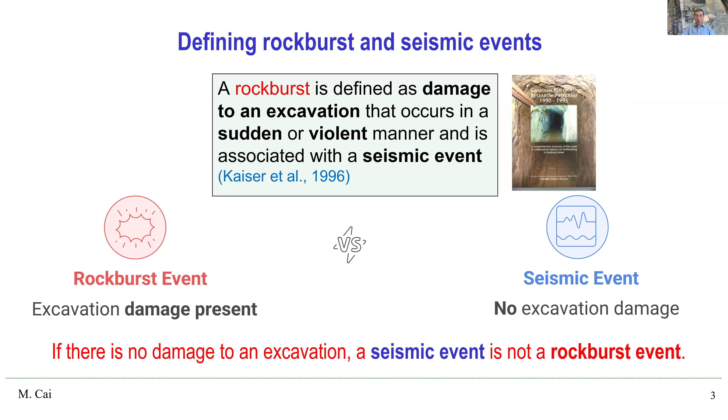At the same time, we also need to differentiate between a rockburst event and a seismic event. A seismic event might be just something where we have vibration of the ground. When we talk about a rockburst event, usually there's damage to the excavation. But for a seismic event, not necessarily will there be damage. So if there's no damage to an excavation, normally a seismic event is not called a rockburst event. Understanding this distinction is critical for evaluating rockburst hazard and planning response.

Rockburst can be generally categorized into three types: strain burst, pillar burst, and fault slip burst. Strain burst often occurs at or near the excavation boundary, where the stress concentration is the highest. It can also occur in tunnel and shaft walls and face, even pillar walls.

Pillar burst, on the other hand, occurs when a highly stressed pillar collapses violently. In this case, the pillar core has to fail - we call this type of failure a pillar burst. If it's only the skin of the rock that is bursting, that's a strain burst. Fault slip bursts, of course, involve sudden shear along existing geological structures like faults, or it could be the creation of new faults due to shear failure of rock.

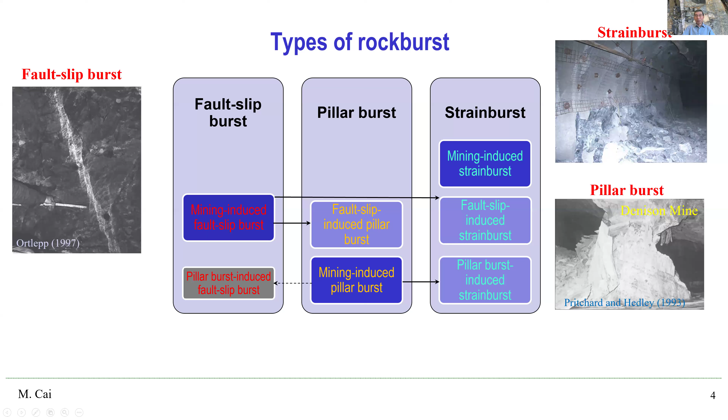In terms of triggering mechanism, the dominant force behind those events are mining activities - so that's why I show mining-induced types of events. If you have any of those events occur, like mining-induced fault slip events, those events can subsequently trigger additional events like pillar burst events or strain burst events. Similarly, mining-induced pillar burst can also trigger smaller events like strain burst, and it can also potentially trigger fault slip events if the fault is near critical equilibrium.

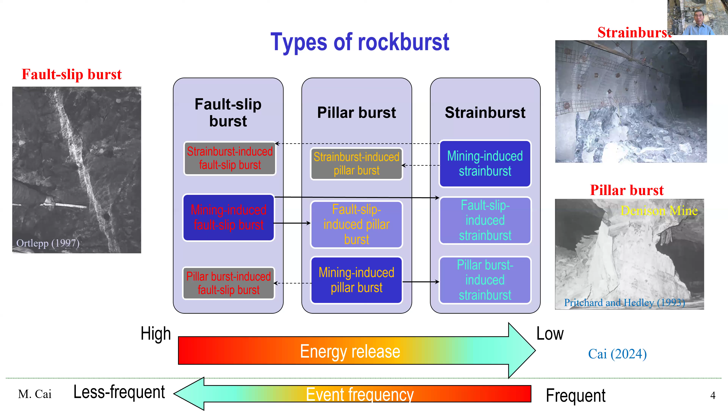In the same argument, a smaller strain burst event can also potentially trigger larger events if the pillar or the fault is in critical equilibrium. In terms of energy release, fault slip events release the highest energy, but strain bursts release the lowest. In terms of frequency of occurrence, strain burst is the most common type of event that we see in underground mines.

In terms of conditions for rockburst occurrence, many researchers and scholars have done a lot of research, and now we have a better understanding. I summarize them into four conditions. First, the mining-induced stress has to be high in order to trigger rock failure. If there's no failure, there will be no rockburst. It's that simple.

The second condition is that the rock has to be able to store a large amount of strain energy before failure. That's why rockburst normally occurs in competent rock that can store a lot of strain energy before failure. The third is the brittle condition: the rock has to be a brittle type of rock, because brittle rocks tend to fail violently, leading to large energy release.

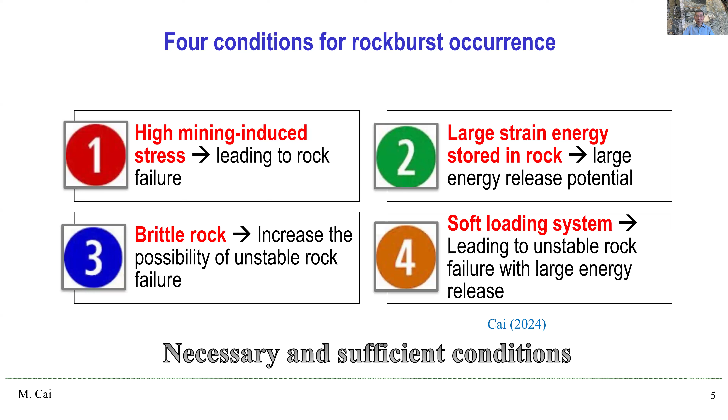And finally, the mine loading system stiffness has to be low. In this case, rock failure will be unstable or violent. So those are the necessary and sufficient conditions for rockburst occurrence.

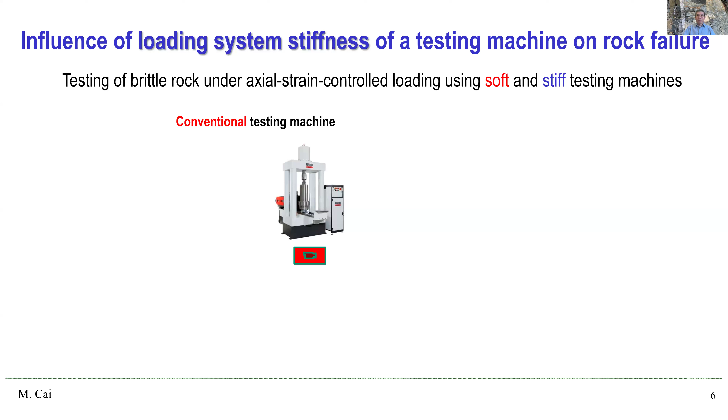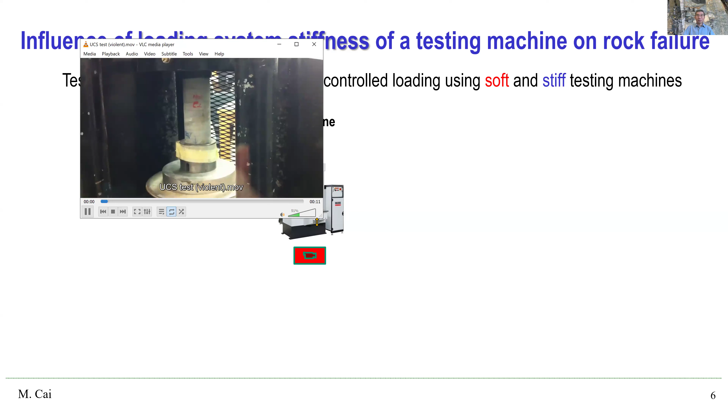Now, the loading system stiffness influence can be easily understood if we focus on rock testing in the lab. If you use a conventional machine to test rock, due to low stiffness, you're going to see violent failure. This is the type of failure. I'm going to play a video here.

Basically, we are creating a rockburst in the lab due to the low stiffness loading environment.

On the other hand, if you have a stiff machine to test the rock under axial loading conditions, for example a machine like Stiffman, we can actually control post-peak failure of rock without necessarily introducing violent energy release. So this is a test of granite using Stiffman.

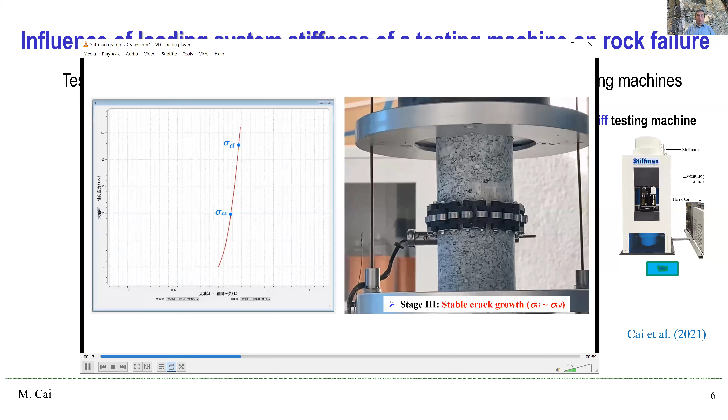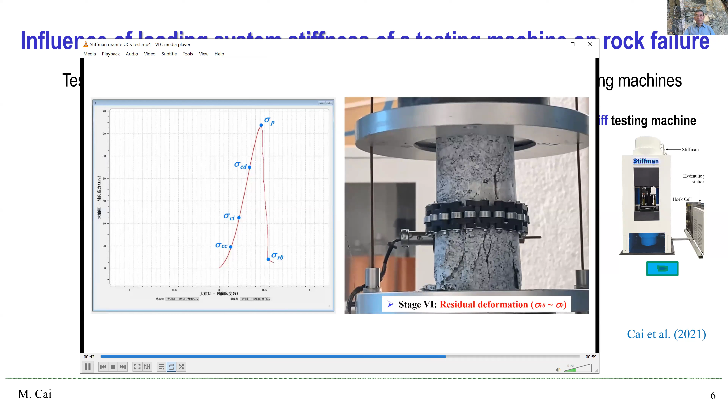As you load the rock gradually, this is pre-peak, and we have some characteristic stress levels, as you see here. Once you reach the peak, and it's going to reach the peak pretty soon, the rock just spalls and cracks, but without a violent energy release.

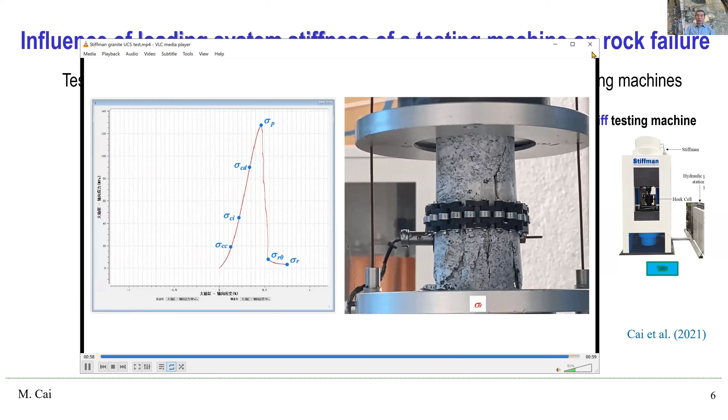This is because we have a stiff loading environment that allows us to control post-peak failure without excessive energy release. And if we look at the load-displacement curve, or stress-strain curve, assuming you have a rock with this kind of behavior...

But if you test this rock in a soft machine, once you reach the peak, the rock is going to fail violently, as you see in the video, with excessive energy release. The area under this load-displacement curve indicates the amount of energy that will be released. This type of failure will be violent—that's a rockburst, which we can create in lab testing.

But if you have a stiff machine with stiffness steeper than the post-peak curve of your material, you can control the post-peak loading process. You actually need additional energy, indicated by the area, to further fracture the rock. So in this case, we have a stable failure.

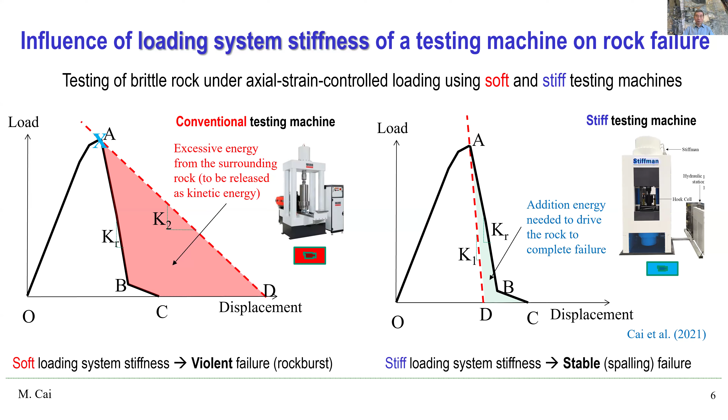Those two types of failure mode can actually be observed underground—not all failure will be violent, nor will all failure be stable. They can occur depending on the loading system stiffness. This is a condition I mentioned in the previous slides, a very important one.

But when we talk about rockburst hazard, we're talking about the likelihood and severity of sudden and violent failure of rock mass surrounding underground excavations. So rockburst hazard, of course, is closely related to seismic hazard.

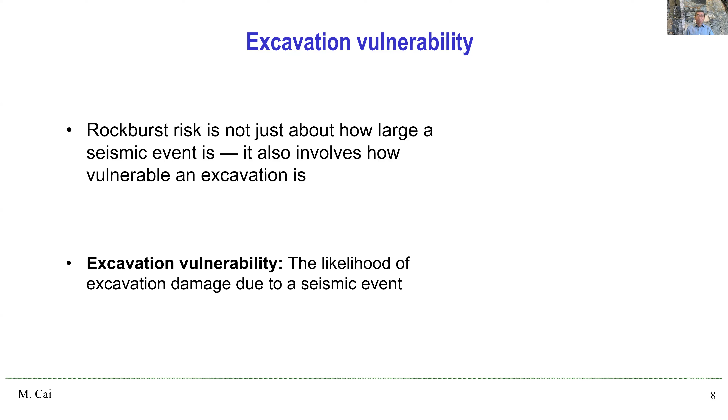This is another important concept in rockburst risk management. What is excavation vulnerability? It is defined as the likelihood of excavation damage due to seismic events. So only excavations with high excavation vulnerability will be prone to rockburst damage. This is a very important concept as well.

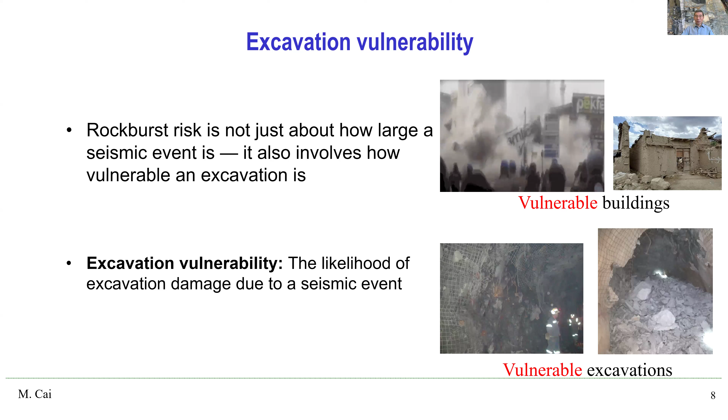In order to understand excavation vulnerability, let's talk about the building vulnerability to earthquakes. If you have buildings that are not well built, with low standards, sitting on bad foundations, those buildings will be very vulnerable to ground motion from earthquakes, and they may collapse and cause harm to people. Similarly, underground excavations, if they are not well designed or well supported, have a higher vulnerability. So this is easy to understand.

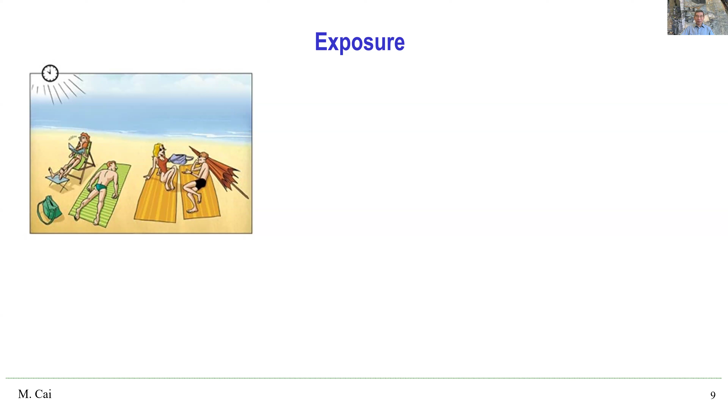Another important concept we need to understand here is exposure. People increase their chance of having skin cancer if they expose themselves to the sun for a long period. So if we want to mitigate this risk of skin cancer, it is wise to wear sun cream or limit exposure to sun. Everybody understands this.

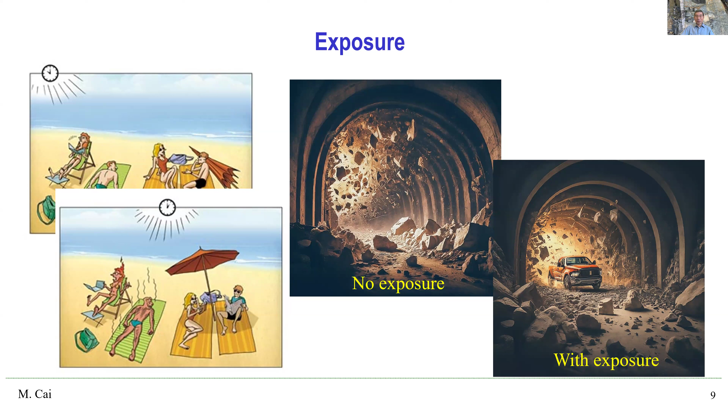Similarly, in underground mining, to mitigate the risk of rockburst, we need to limit or avoid exposure to rockburst hazard. And if you have exposure, the consequence could be dire. So exposure definitely is another aspect we need to consider.

Now, as we discussed so far, we know that rockburst hazard is the occurrence of a violent rock failure. Excavation vulnerability indicates the likelihood of excavation failure due to a seismic event, and exposure measures how a worker or mining equipment in a place could be affected by rock failure caused by a rockburst. So if we consider all those three aspects, the union of rockburst hazard, excavation vulnerability, and exposure, now we have rockburst risk. That's the definition of rockburst risk.

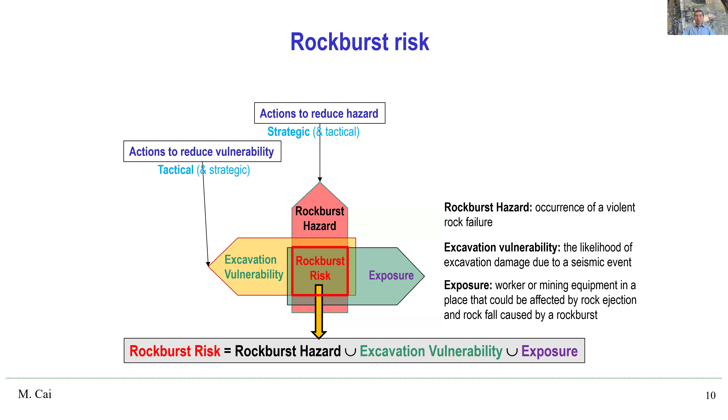So to reduce rockburst risk, we need to do something to reduce the hazard, rockburst hazard. Mostly we're going to use strategic and tactical measures. We can also take actions to reduce the vulnerability of excavations using various techniques. We also can take actions to reduce exposure, mostly using administrative measures. So all those things that we do is what we call rockburst risk management.

Next, I'm going to quickly discuss a very useful bow tie analysis of rockburst. Bow tie analysis is a risk assessment methodology that visually represents the relation between potential cause, consequence, and preventive or mitigation barriers of a specific hazard.

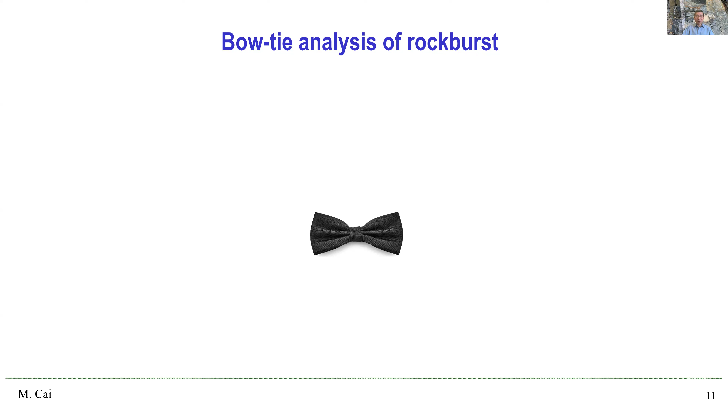So for applying this kind of analysis to rockburst, we first understand that on the left-hand side, we list the potential threats or causes of rockburst. Those can include high stress, for example large geological structures, poor mine design, mining sequences, etc. So those are the potential causes for rockburst.

The center knot of the bow tie represents the top event. In this case, we have the rockburst. On the right-hand side of the bow tie, we have the potential consequence or effect of a rockburst, which may include injury to workers, fatality, damage to mine infrastructure, mining equipment, loss of ore body, and operation disruption, etc.

Between the cause and the rockburst event lies the prevention barriers or control measures that we can use to reduce the likelihood of rockburst. And we have a few things listed here that we're going to discuss to reduce the likelihood of rockburst.

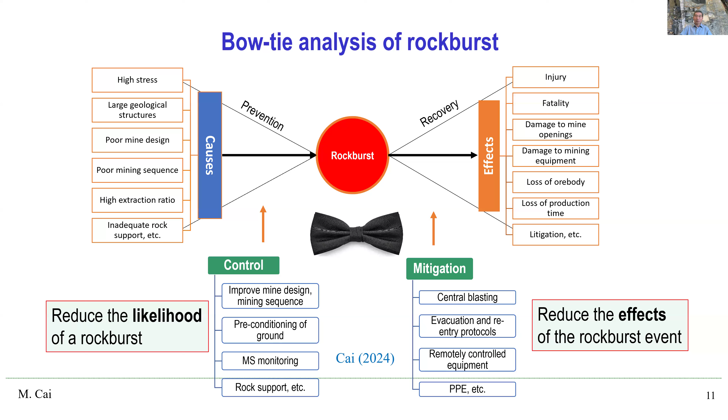And of course, between the rockburst event and the effect lies the recovery or mitigation measures that can be used to reduce the effect of a rockburst event. So here we have listed a few of those control measures. And of course we need to focus on the important ones, to help us understand which one is important, which one is less important.

Let's see the hierarchy of control. We have different controls, but not all controls are equal. So there's a hierarchy that simplifies all controls into 5 levels: elimination, substitution, engineering control, administrative control, and PPE.

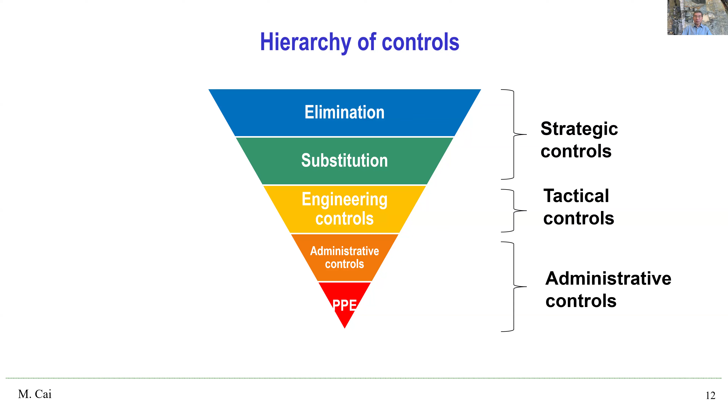Here, elimination and substitution address the rockburst hazard at the source and are the most effective during mine design and development stage. They are the strategic controls. Engineering controls prevent hazard from affecting workers and equipment - those are tactical controls. Administrative controls reduce the exposure through work practice, with PPE at the bottom of the hierarchy of controls.

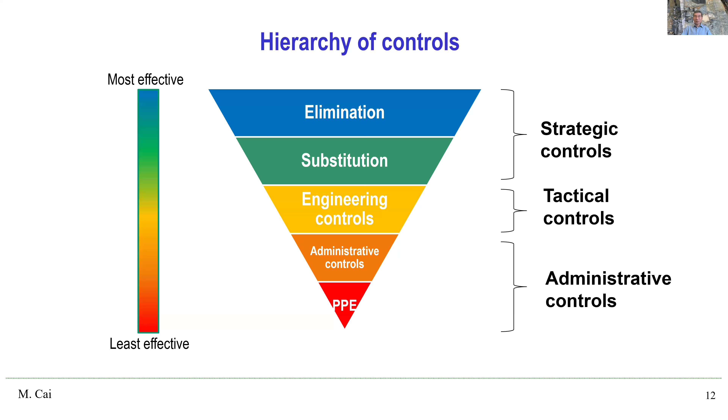As we move down from elimination to PPE, you can see that the effectiveness reduces. This is the hierarchy we can follow because it prioritizes strategic over tactical or administrative measures.

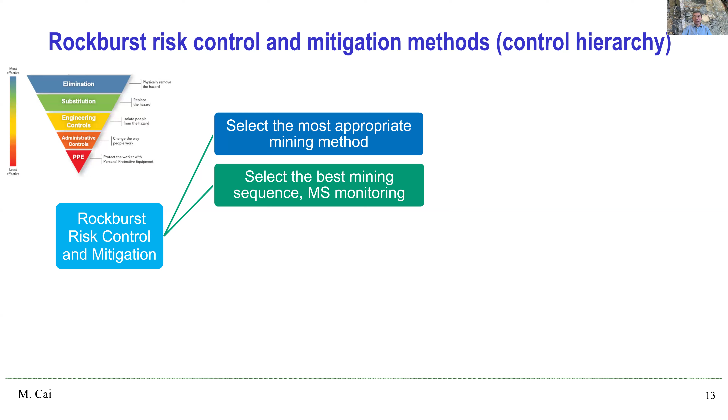Following those concepts of the control hierarchy, we can have a different method for rockburst risk control. We start from selecting the most appropriate mining method at the top, followed by the best mining sequence, use microseismic monitoring, conduct precondition of ground, use backfill rock support, and use, for example, remotely controlled mining equipment to reduce exposure. Lastly, use PPE.

So these different measures can be characterized into strategic, tactical, and administrative control methodology, with effectiveness ranging from most effective to least. Now I'm going to provide a few examples of discussion for each type of method.

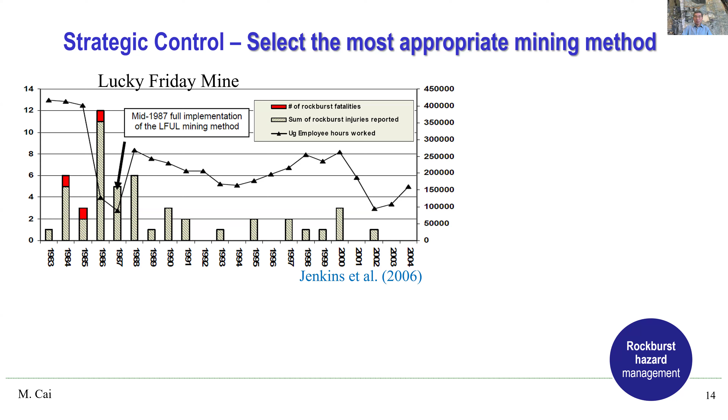Selecting the most appropriate mining method is at the top. Here we have one example showing the number of fatalities from 1983 to 2004 at the Lucky Friday mine. The mine used the traditional overhand cut-and-fill method until 1986, then switched to the underhand longwall mining method in the middle of 1987.

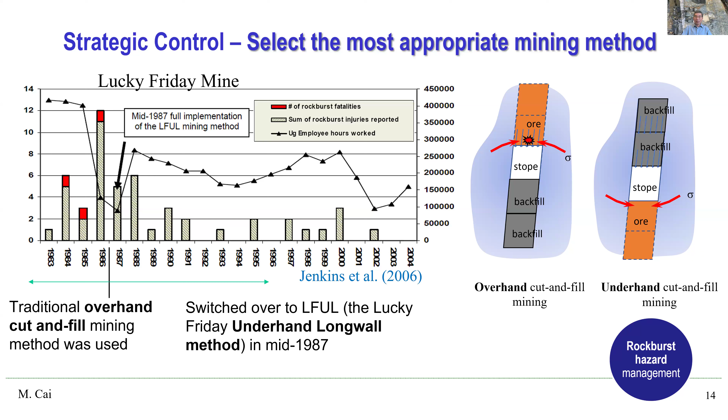Why did they make this switch? It's because the underhand mining method is much safer in a high stress environment. Since switching, no rockburst fatality has occurred at the mine site. This is easy to understand: if you compare overhand mining versus underhand mining, the highly stressed ground is either above your head or below it, which makes a huge difference when the stress is extremely high.

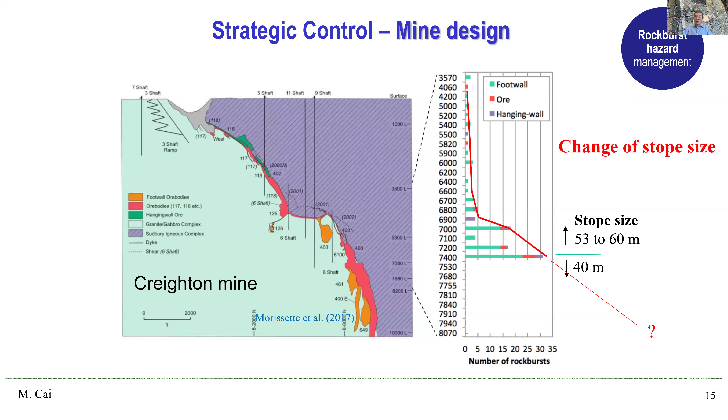But when we look at the size of the stopes above the 7,400 level, the stope size used was 53 to 60 meters. They later decided to reduce the stope size to 40 meters, and further reduced it to 26 meters in one of the ore bodies, the 461 ore body.

Due to the reduction of the stope size, you can see the number of rockbursts actually reversed the trend instead of increasing, and then decreased. This is easy to understand because if you reduce the excavation size, each blast releases less energy, and smaller excavations have less deformation potential, resulting in fewer rockburst events.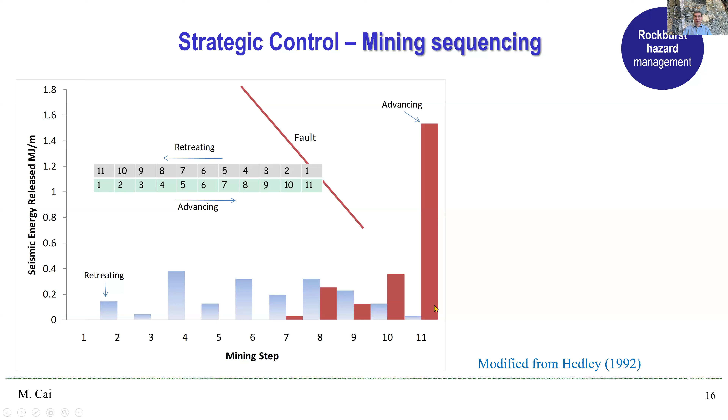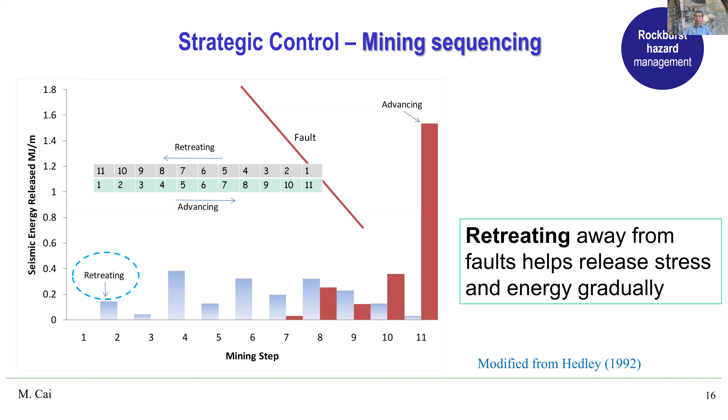If you are advancing towards the fault, you see a very large energy release in the last step. This is definitely not good in terms of energy release control. So retreating away from faults actually helps reduce the energy release and reduce the risk of rockbursts.

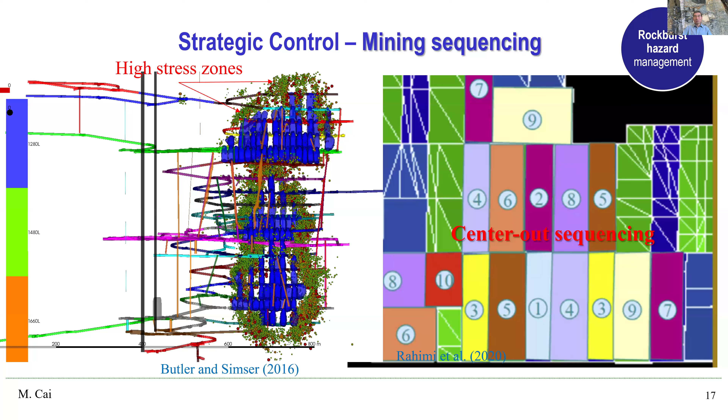For open stoping mining, we normally have primary and secondary stoping techniques, and center-out sequencing is widely practiced. Why is this useful? Because, based on microseismic monitoring data showing the concentration or clustering of events indicating areas of high stress, if you use center-out sequencing, you can push high stress to the outer boundary, keeping the low stress zone inside your mining area, which makes mining much safer. So sequencing is definitely a factor we can consider in rockburst risk management.

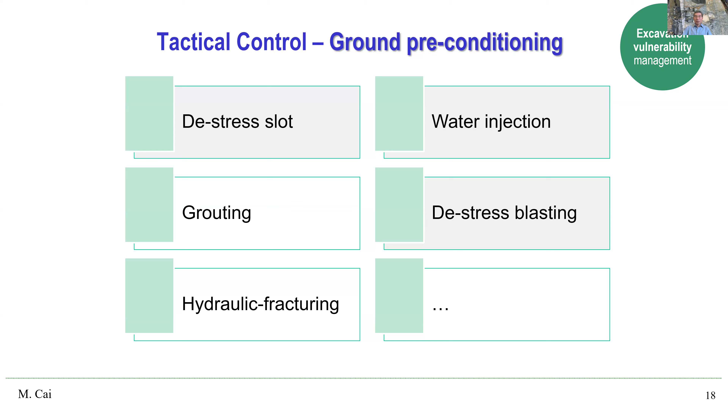For tactical control, there are many different techniques. Ground precondition is a category we talk about here, with lots of methods in this category. In hard rock mining, we mostly focus on destress blasting, and these days people also try to use hydrofracturing to condition the ground. Destress blasting has been practiced in many mines.

Here we have one example: this is the Onaping Depth mine during the construction of a shaft.

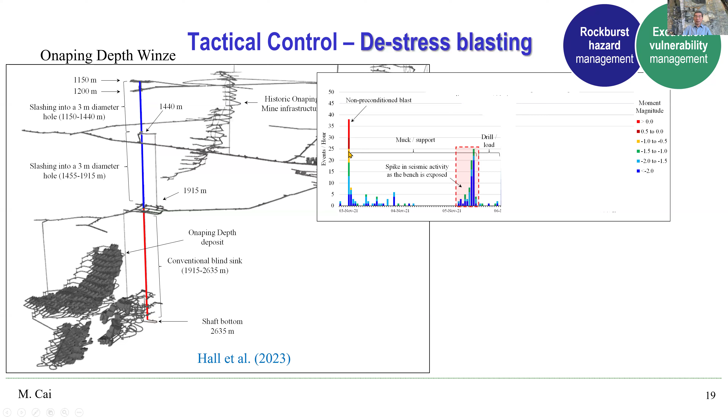This is the construction using conventional blind sink operations. In this case, we have people working at the face. Due to the great depths and high stress, the strain burst risk is extremely high. This example shows basically one cycle of development.

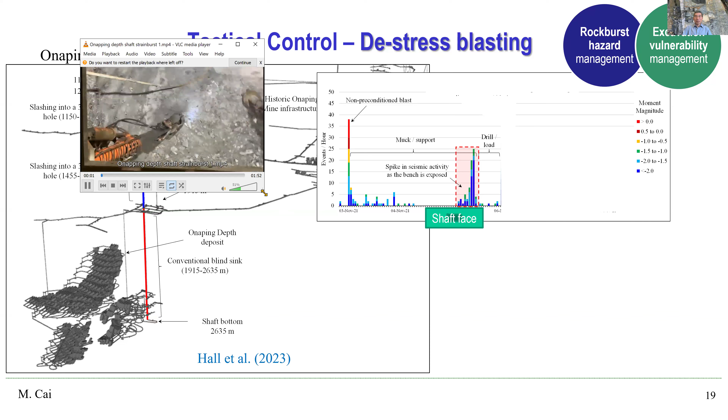After you blast the round, there's a spike of seismic activities, and then as you track it till the end, when the bench is exposed, you see a spike of activities. So there's a short video showing how dangerous it is to work at the face at the bottom of the shaft when the stress is very high without preconditioning.

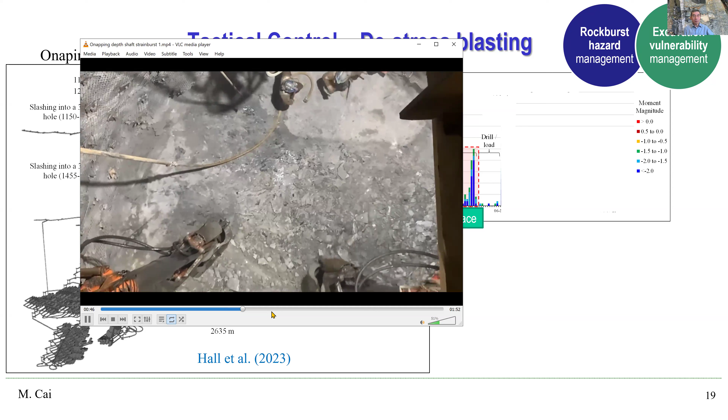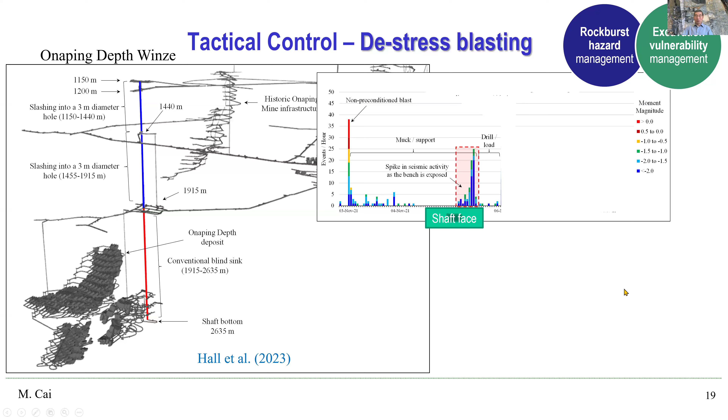Now you see the strain burst occurred at the bottom of the shaft. That's the type of strain burst events you can experience if no preconditioning is practiced.

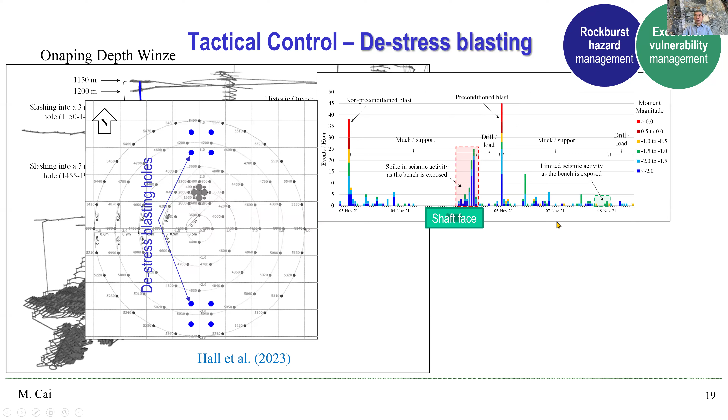This is not acceptable, so mines develop de-stress blasting techniques using different types of patterns. This is one type of pattern that's used. If you use de-stress blasting, you can see there's no spike of seismic events, and this has proven very useful in mitigating strain bursts at the face, because we have workers directly working at the face.

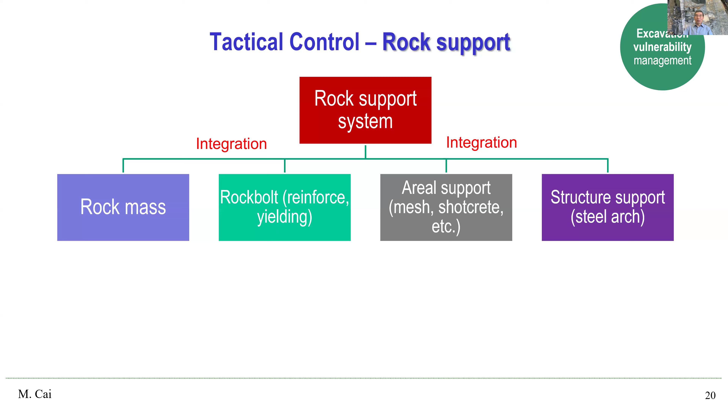Rock support is a technical engineering control measure. It's very important for rockburst risk management. The support system includes rock bolts, areal support, and the rock mass itself, which interact with each other to achieve the support functions.

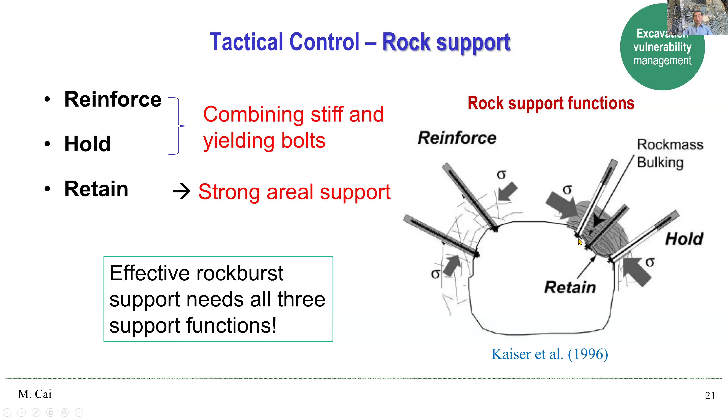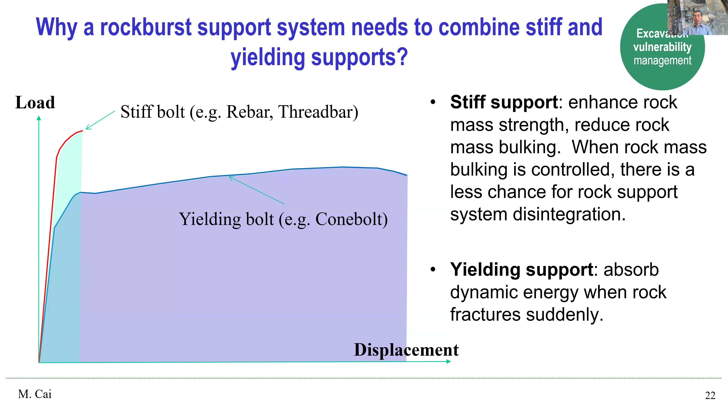In terms of support function, we have three major functions: reinforce, retain, and hold. Effective rockburst support needs all three. For reinforce and hold, we can combine yielding support with stiff support, but for retaining functions, we need strong areal support. It's important to combine stiff and yielding support because stiff bolts can reinforce the rock and control bulking to prevent disintegration of rock mass. Yielding bolts have large energy absorption capacity, which helps absorb sudden release of energy due to rock failure.

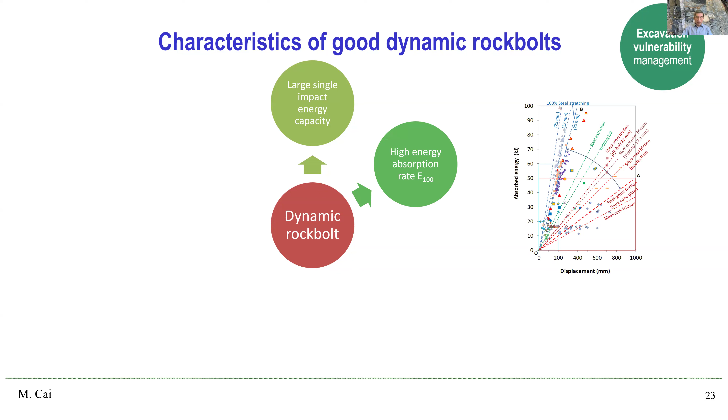Rock bolts play a key role in excavation vulnerability management. Here we list a few characteristics for good dynamic rock bolts. First, they need large impact energy capacity. The energy absorption rate has to be high, and the indirect loading ratio also needs to be high. You also need large displacement capacity, good bulking control ability, and good shear resistance capacity. Those are the characteristics needed for dynamic rock bolts.

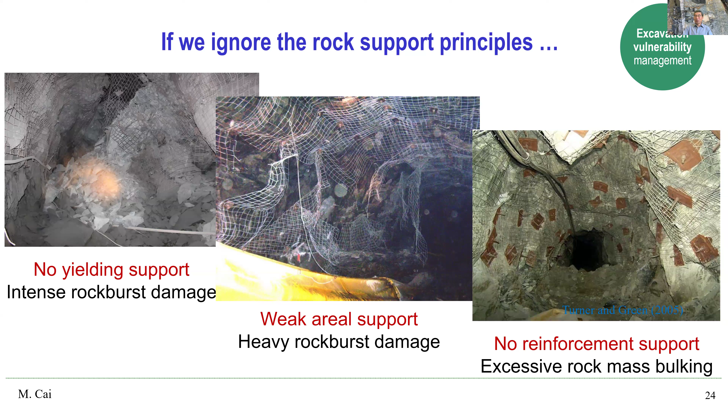If you ignore those requirements or support principles, you're going to see consequences. In this example, we see no yielding support in the system, leading to intense rockburst damage. In this case, we have very weak areal support, which leads to heavy rockburst damage. And here, there's no stiff reinforcement support in the system, leading to excessive rock mass bulking.

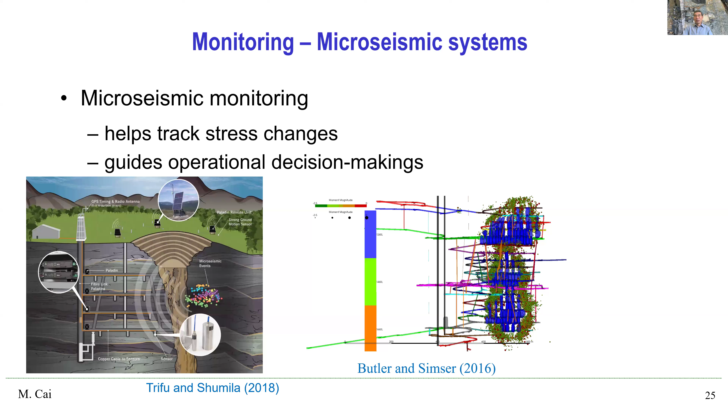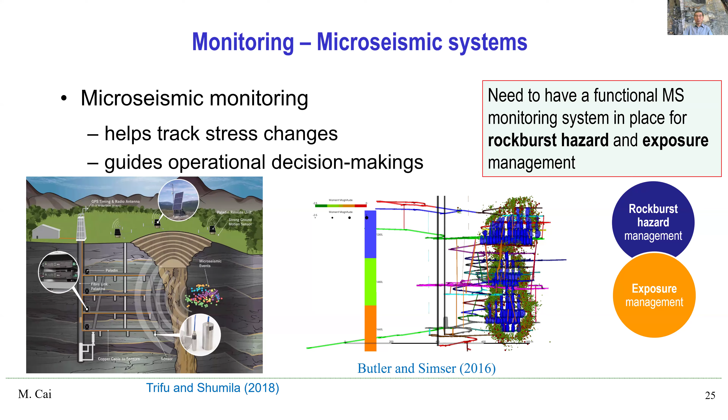Microseismic monitoring is a technique widely used. It can help us track stress change and also help us make operational decisions, such as reentry protocols. This is a technique we can use for both rockburst hazard and exposure management.

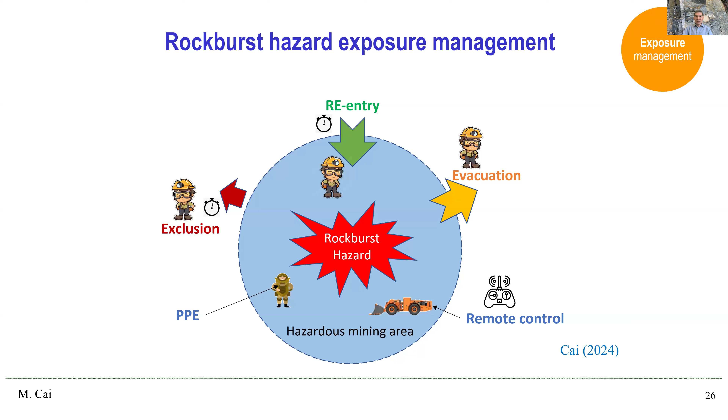For exposure management, there are many proven methods we can use. First, we need to determine the rules for exclusion time and zone based on statistical analysis of historical seismic response due to blasting. Next, we need rockburst reentry protocols in place. We also need a plan for evacuation when a rockburst occurs. In some cases, we should replace handheld equipment with mechanized tele-remote systems to reduce worker exposure. Finally, PPE can also be useful in some cases to protect workers from flying rocks.

In terms of reentry protocols, we can have site-specific rules developed. This is a general concept, and typically after a major event, you can see the seismic activities increase drastically.

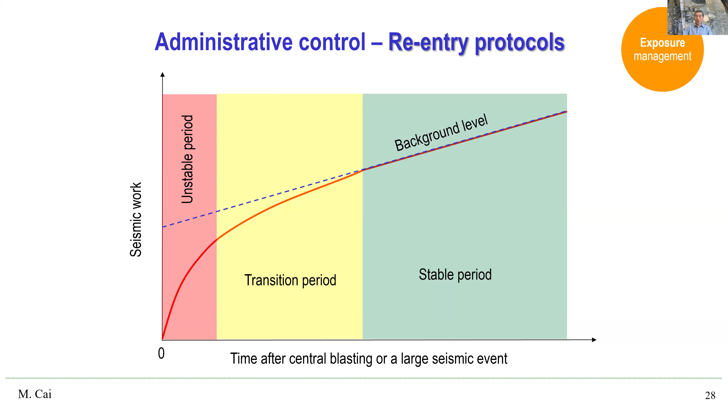Initial phase, we have a rapid increase, and then there's a transition period, and after that it returns to the so-called background level. Based on this kind of site-specific curve, we can actually determine the time for re-entry after each rockburst event.

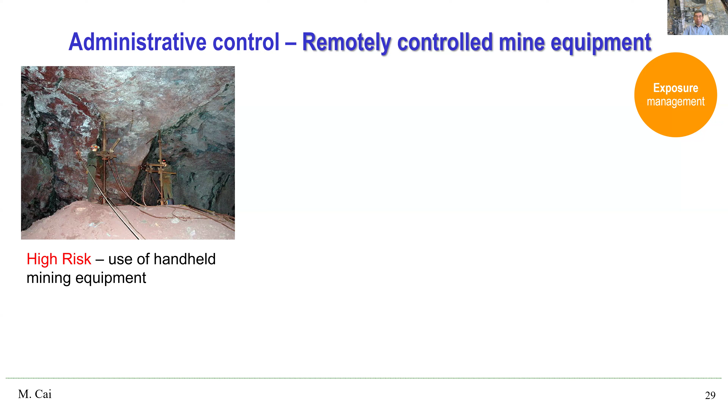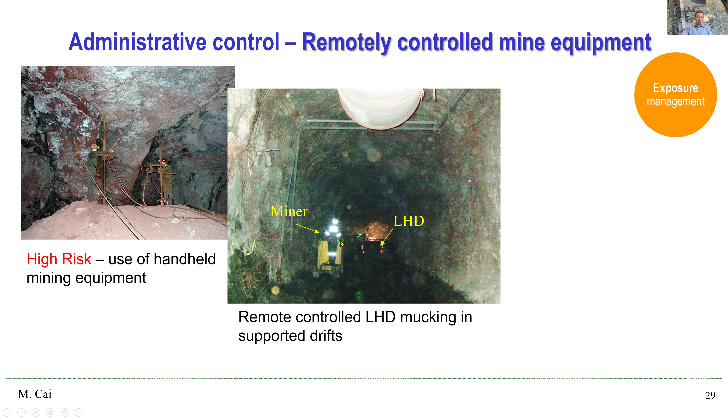Now, if you have handheld equipment, in those kinds of situations, usually workers work inside the stope, and it presents high risk for them. If we can use remotely controlled equipment, in this case use remote control to control the LHD to do mucking inside the stope, and this will reduce the exposure of the worker to fallen rocks or to rockburst.

In some cases, mostly in block caving mines, we see that miners can actually sit in the surface office to control the equipment working underground. In this case, it completely eliminates exposure to rockburst risk. So this is another technique that we can consider and use.

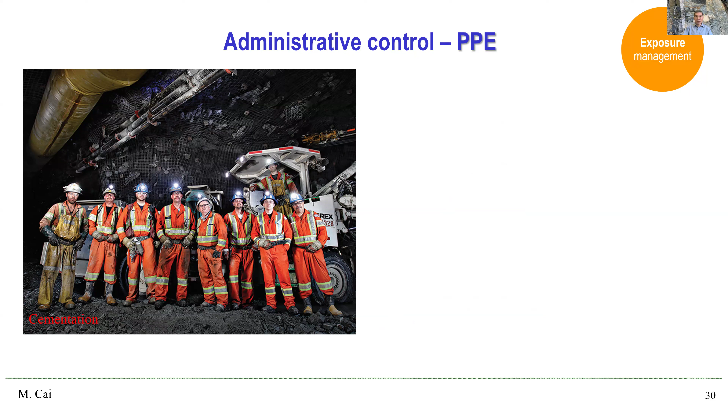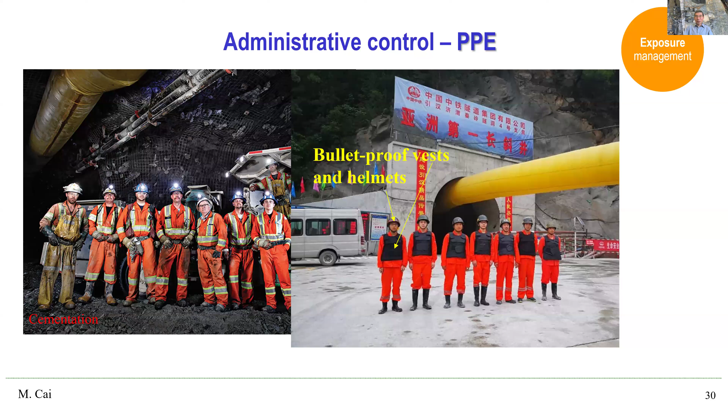PPE, of course, is the bottom of the control hierarchy. What you see here is the typical PPE for Canadian miners, and this is standard. This is the PPE that is given to workers who work at a water diversion tunnel in China, because there's a lot of strain burst events occurring during tunneling, and they were actually given bulletproof vests and helmets to allow them to work in those kinds of environments.

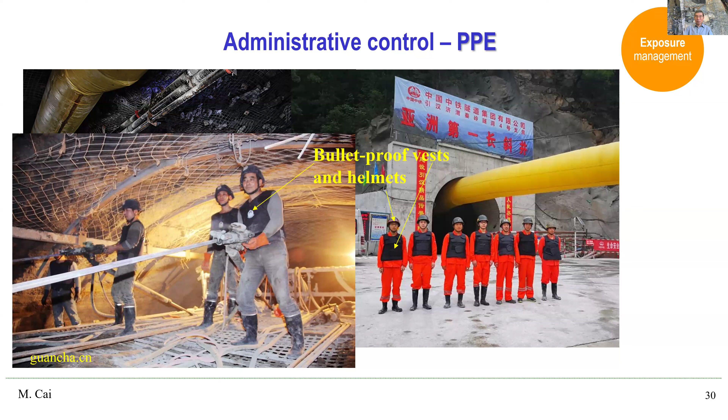Here is another tunneling project as well, where workers were all given bulletproof vests and helmets. Of course, if you have large rockburst events, those types of PPE may not actually do a lot of help, but if you have small flying rock, they do provide some protection, especially at the psychological level, to provide assurance for the workers working in those kinds of environments.

Now, we know that rockbursts are what we call black swan events. The key features of black swan events are: they are very rare, the events have significant consequence once they occur, and most importantly, they are very unpredictable, even though they become explainable in hindsight.

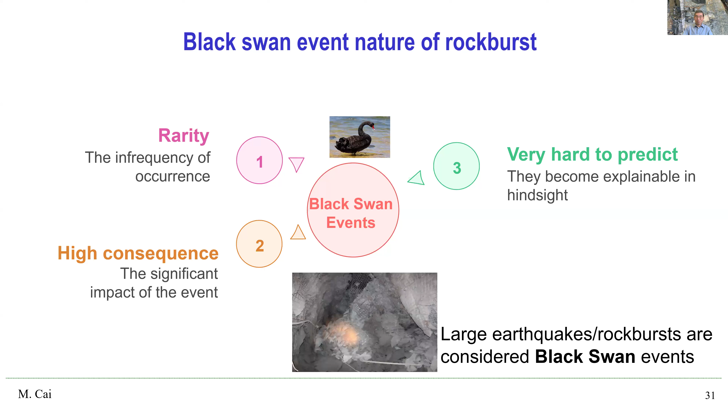In the literature, you actually see a lot of publications focusing on rockburst prediction research. In my opinion, it's very difficult to predict rockburst because they are black swan events. So the advice here is focus on resilience, not prediction.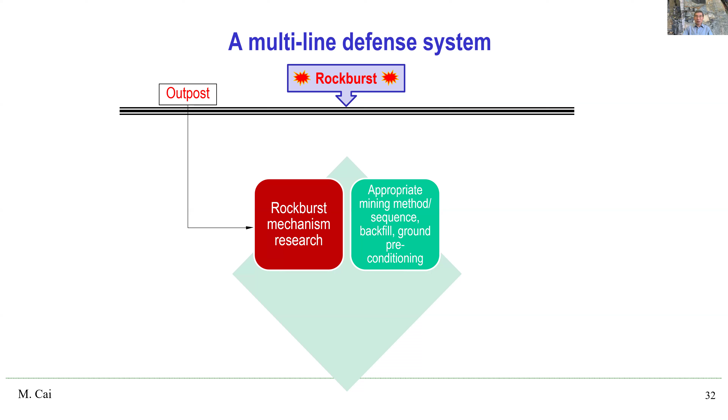The second is using some of the techniques that I discussed in today's talk, and those techniques focus on rockburst hazard reduction — I call them the first line of defense. You can also employ some techniques discussed today aimed at exposure reduction — I call them the second line of defense.

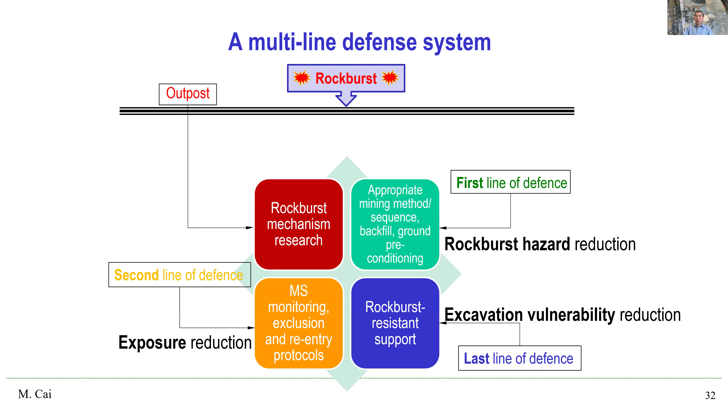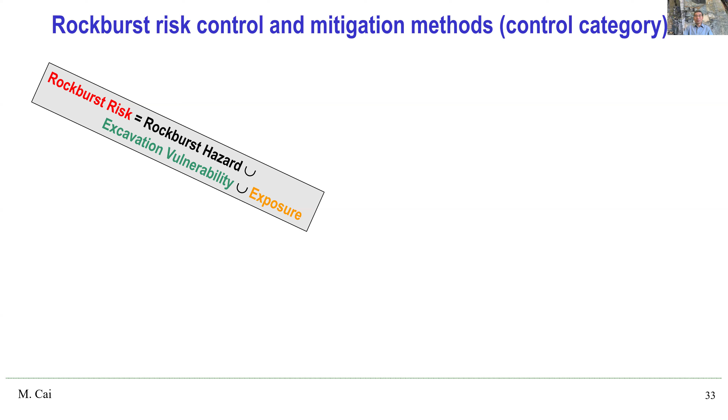Finally, using rockburst resistant support will provide you the ability to reduce excavation vulnerability, and this is the last line of defense. It's also the most important line of defense, of course. So by doing so, we build a multi-line defense to deal with the rockburst problems in deep mining.

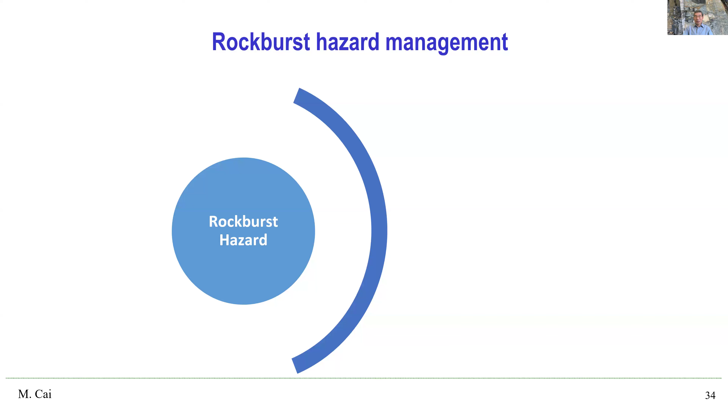Just to have a quick recap here, we know that rockburst risk is the union of 3 things. To manage rockburst risk, we need to focus on those 3 different aspects using the methods we discussed so far. There's lots of methods that we can use, and we need to focus on, first of all, the hazard — rockburst hazard.

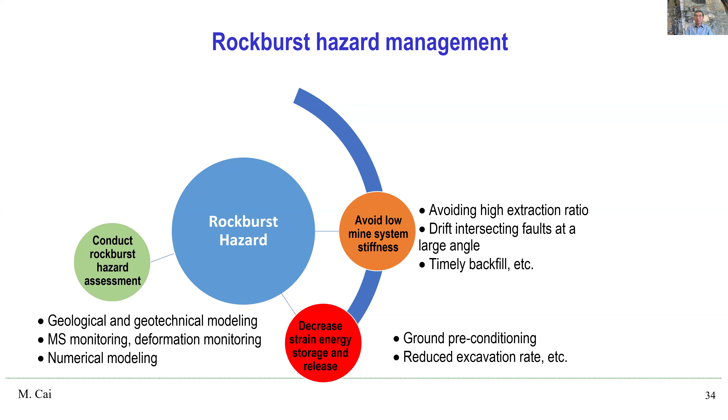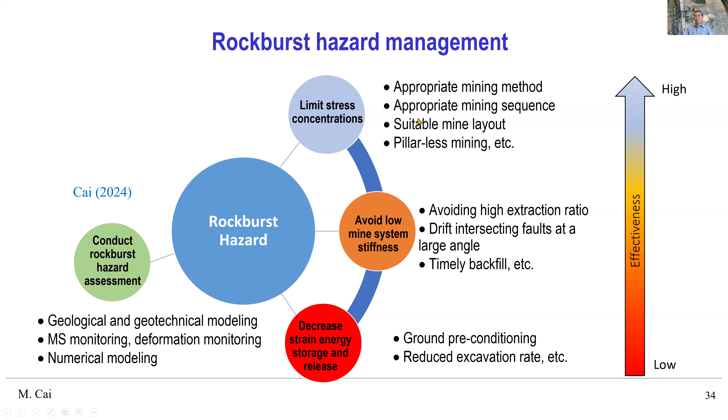From the assessment, to decrease strain energy storage and release using different techniques, to avoid low mine system stiffness, and finally to limit the stress concentration using different techniques. In terms of effectiveness, reducing the stress concentration will be the most effective. That's why using the technique listed here will be most effective. So that's the focus on rockburst hazard.

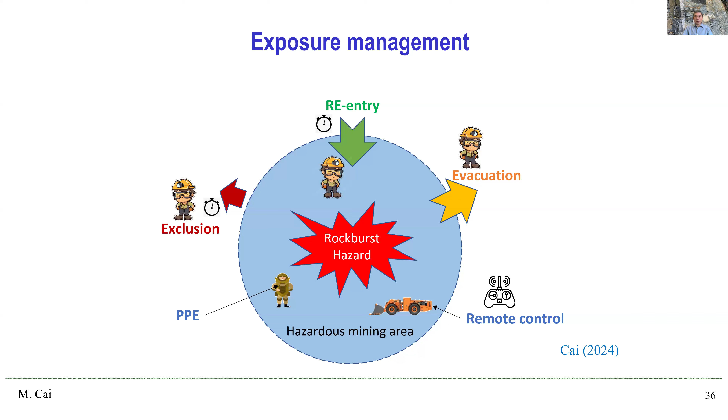For exposure management, we have different methods that we discussed. You can also use them to manage this type of risk.

In terms of control, we have lots of control and mitigation methods. The question here is, which one is the most critical? Of course, different people may have different opinions. In my opinion,

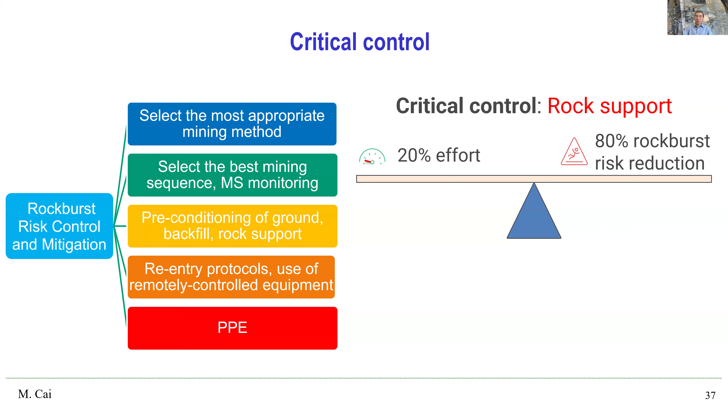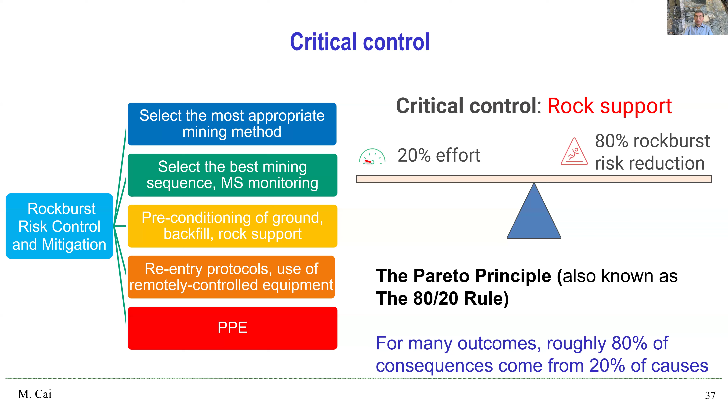the critical control is rock support, because to deal with rockburst risk, you need this to be done properly. If we take the 80-20 rule, I think if you have a good rockburst resistant support in place, it will probably take about 20% of all your effort, but can lead to 80% of rockburst risk reduction. So that's the 80-20 rule we apply here, and we focus on rockburst resistance support as a critical control measure that we need to consider in deep mining. Because for other methods that we can use, there's a lot of uncertainty associated with them. But to support ground well, this uncertainty is less compared with other activities.

So the main takeaway from today's talk will be a few things, I think. First of all, we need to understand rockburst risk is inevitable when we're mining at depth. It's something that is going to occur always, for sure. We have to deal with, live with rockburst. And of course, the good news is that they are manageable.

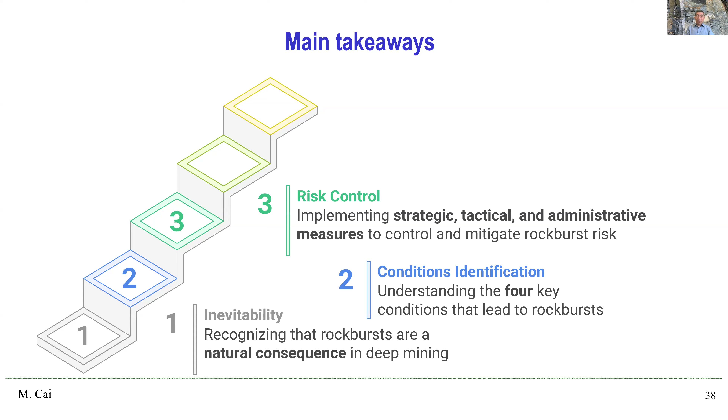The second thing of the main takeaway is for a rockburst to occur, we need 4 conditions. Particularly the fourth condition we discussed, the soft mine loading system condition. Often people ignore this condition when they talk about rockburst.

And the third thing is we have introduced and discussed a lot of strategic, tactical, and administrative control measures. So in our toolbox, we do have a lot of things that we can do to allow us to control and mitigate rockburst risk. So that's the third thing.

Number 4 is we need to build a multi-line defense system. This is simply due to the uncertainty associated with the rockburst event. Finally, I strongly advocate we need to pay more attention to the rock support system. In other words, we need to use rockburst resistant support in ground that have high risk of rockburst. So this is the main takeaway from today's talk.

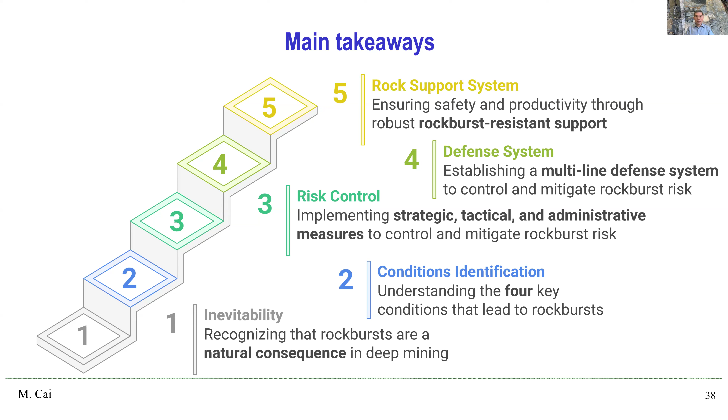I just gave a very quick discussion. Actually, a lot of content that I covered today, I summarized in a paper, which has the same title as today's talk. And if you are interested in the topic, I encourage you to read the paper further, because a lot of details that I cannot cover today are discussed in that paper.

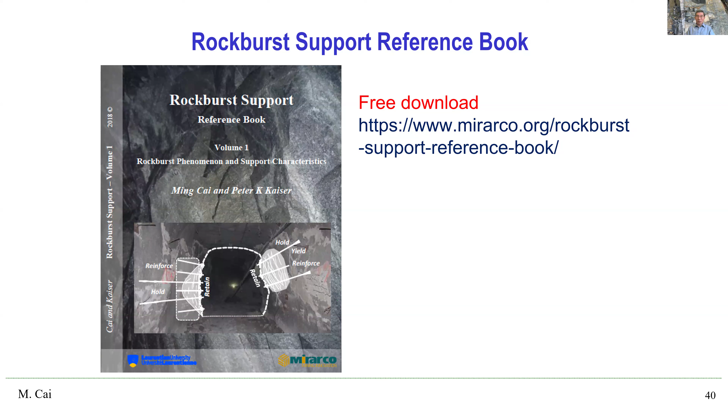At the same time, I focus more on rock support because I consider this a critical support, a very important support. It's the last line of defense. This is why a lot of people actually pay attention to the topic of rockburst resistant support. So again, if you're interested in this topic, we have a book co-authored with Professor Kaiser, and it's free, and you can follow the link to download the book.